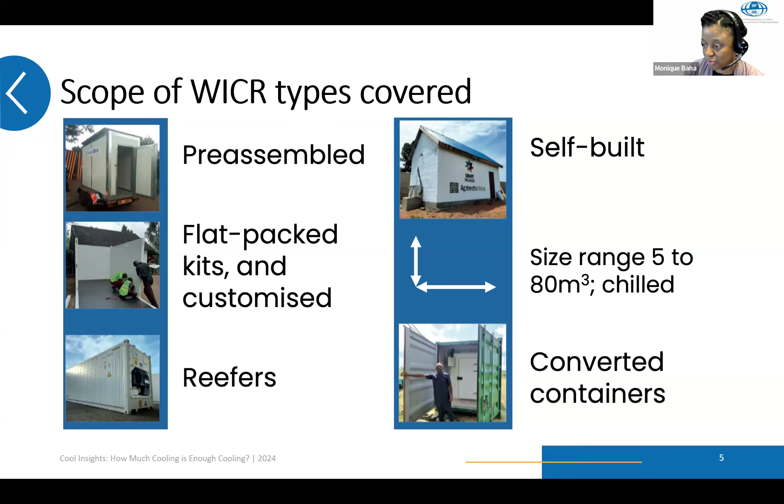Today's speakers: we'll hear from several of the experts who helped prepare the guide, including Giovanni Cortella. Giovanni is a professor of thermodynamics and refrigeration at the University of Udine, Italy. He was president of the Commission D1 Refrigerated Storage of the IIR. His expertise is mainly on cooling systems, with a focus on the improvement of energy efficiency of plants and on heat recovery, aiming at fighting emissions of greenhouse gases.

We will also hear from Jeremy Tait. Jeremy Tait is a mechanical engineer and independent policy specialist for sustainability and energy efficiency of electrical appliances and equipment. He has over 25 years experience working with governments, national and international agencies, and business on technical policy and compliance. He has led and supported development of energy efficient policies and test methods for refrigeration and cooling equipment, HVAC, electric motors, distribution transformers, and virtually all types of domestic appliances in many parts of the world, including the EU, Egypt, Pakistan, and for the African Union Commission.

Since 2018, Jeremy has increasingly applied his experience to supporting energy access work in global South economies, establishing quality frameworks for appliances used off-grid and with unreliable public grid. Jeremy jointly led conceptual development of the practitioner's technical guide on walk-in cold rooms for rural and off-grid use in global South economies with the International Institute of Refrigeration.

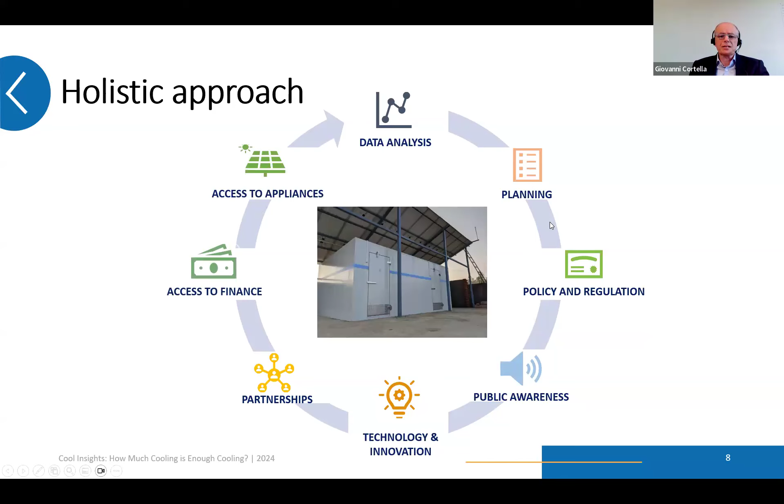In an environment where people are aware of the benefits of using a cold storage, so you have to train farmers and market owners, where cutting-edge technology is employed to improve effectiveness and reliability of the systems, so you have to train designers and technicians, where partnerships and links are established among the farmers, stakeholders and all actors, and finally, where access to financing and state-of-the-art appliances is made easier. So that's the reason why we are talking about a holistic approach, and that's the reason why we were moving to a process which is in this slide.

And this is the ideal path that the guide aims to describe. It can be schematized in a flow chart. This flow chart, you can... oops, something went wrong there. Monique, maybe you had better drive the slides because there's a delay when I move them. So please, can you go back one slide? Thank you so much, you better control it.

So we were saying this is the ideal path that the guide aims to describe, and it can be schematized in a flow chart. This flow chart follows in some way the contents of the book. The aim is to offer guidance through the steps to plan, specify, install, and run a cold room, enabling effective discussion with specialists, suppliers, and funders. So specifications for a cold room are not easy to define, and this integration of the cold room into a value chain is quite complex as well.

And possibly it needs independent professional advice, better if found locally, because you have to consider specific requirements of the area or the market. So the path from the first idea to an operational cold room is shown here. First, you have to check if a cold room is the right solution to the problem, through the evaluation of the market needs and the availability of technologies and funding. This is a crucial point.

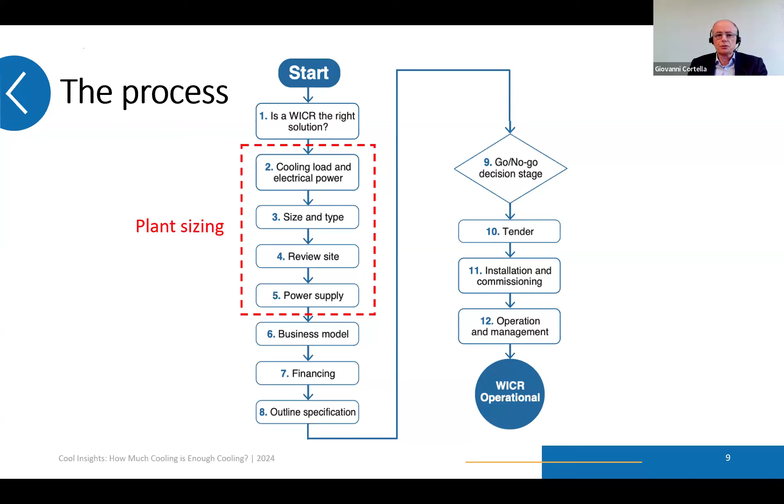Installation is a crucial phase, because good installation prevents unexpected failures in the future and allows for a long lifetime of the system. Commissioning is important as well for the same reasons. So during its lifetime, the system has to be operated, maintained, and managed, and this is the last step in the guide towards a fully operational walk-in cold room.

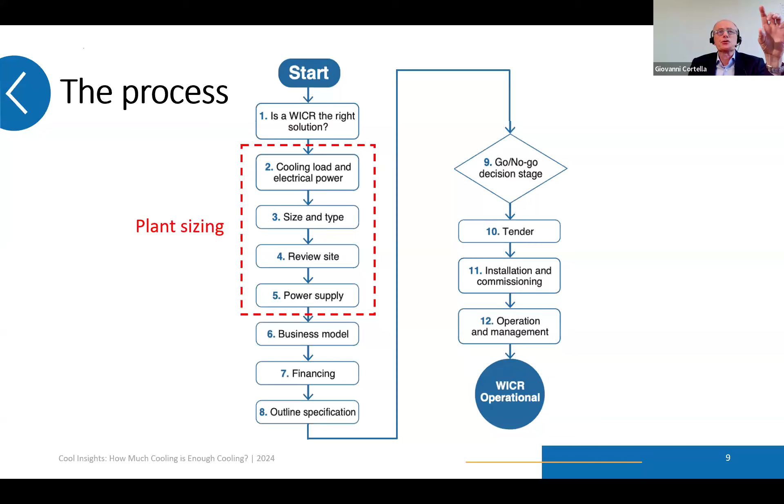We don't have time to go too much into detail among the various phases in this flowchart, but it's important for us to show you how detailed the discussion of these topics is in the guide. In the next slide, we can see what happens when we deal with sizing of the cold room and the cooling system.

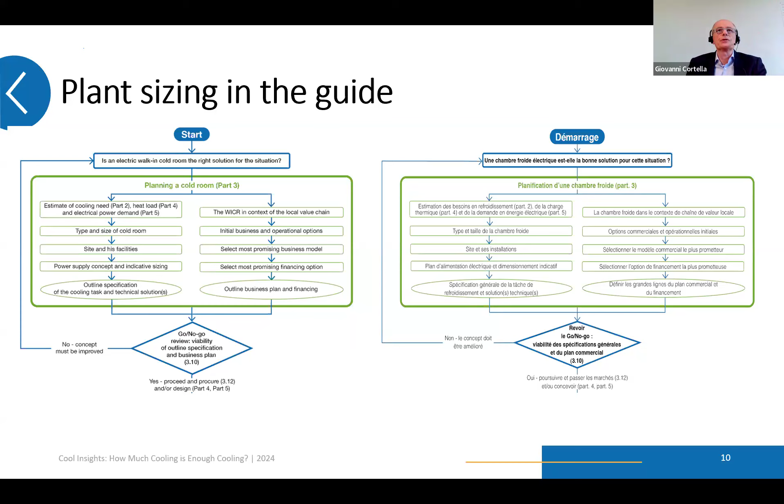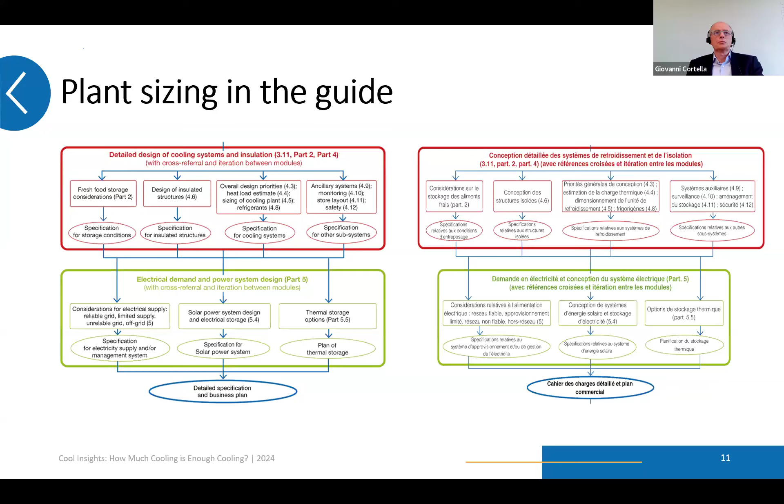As well as estimating the electrical power demand and the power supply options described in part 5. In the next slide, we will see what will be the topic of the next speakers. They will cover the path from cooling to the power supply.

First, we will discuss the importance of pre-cooling, posing the question of whether the plant aims to cover pre-cooling needs before it is correctly designed. A cold room designed for pre-cooling will be able to supply also cold storage if needed, while a cold room designed for storage will definitely fail when warm produce is loaded. So that's a very important choice.

This electrical power need should ideally match the energy availability. However, solar energy prevents having energy availability 24 hours a day, and thus this requires some kind of energy storage, which can be electrical or thermal storage, and we will deal with both. So this is the agenda for today.

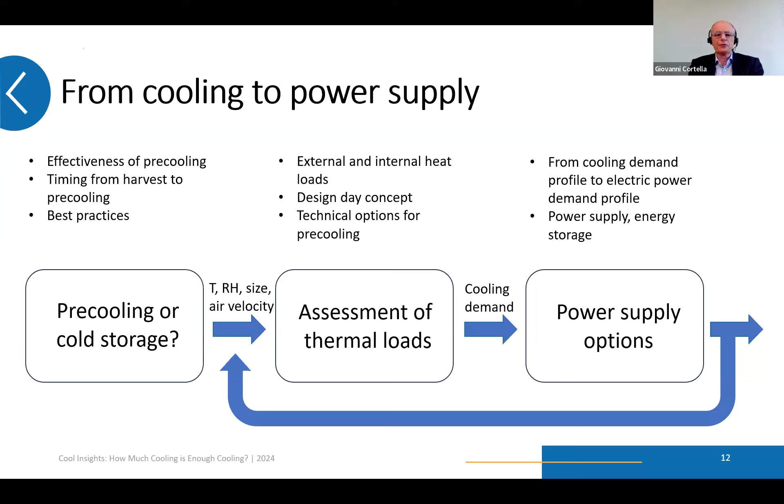Thank you, Giovanni. Yes, I will be talking about cooling and the purpose of cooling and cold rooms. Let me see if I can go through the slides.

First, I want to take a step back. Why are we cooling, and why is cooling so effective? Basically, what not many people know is that fruits and vegetables are alive. So when they get off the tree or from the ground, they're still alive and breathing, releasing heat. They dehydrate, they can be hurt if you drop them, they can get sick from diseases, and they can die when we throw them away. This process of being alive can be influenced by regulating the temperature, relative humidity, and airspeed around the product, meaning that we can control how long fruits and vegetables can be living in this process.

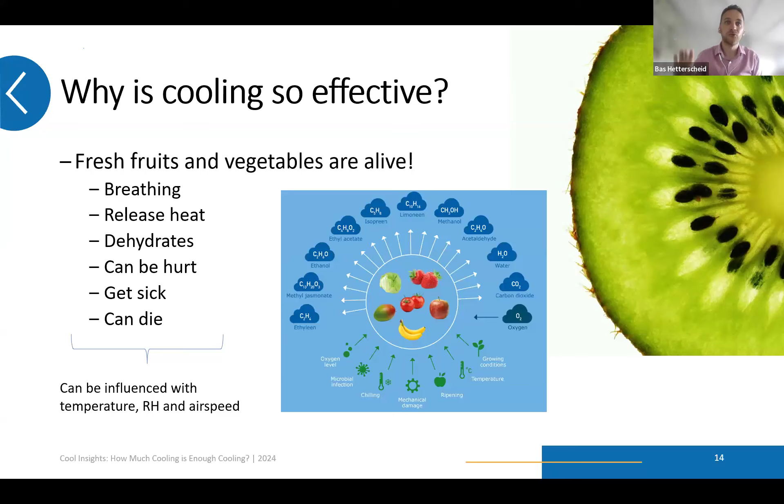So that is actually where, or why, cooling, relative humidity, and airspeed are so important. And that's also depicted in this picture where we show the control measures in green as well.

Knowing that the products can be influenced, we want to know how they can be influenced, and that is elaborated quite nicely on page 26 of the guide being presented. In the guide, we elaborate the impact of temperature on products. For example, you see in the top table that respiration, the breathing speed, can be regulated by temperature, and the lower you put the temperature, the lower the respiration, the slower the deterioration of the product.

So basically in this overview, everything in green has a positive impact, and everything in red has a negative impact on the shelf life of the product. What you can see as well, for example with temperature, is that chilling injuries can occur. If you make products too cool, they can turn brown. For example, if you store a banana at 5 degrees, it will turn brown because it gets chilling injuries. So there's a balance we need to strike between temperature, relative humidity, and airspeed when designing walk-in cold rooms.

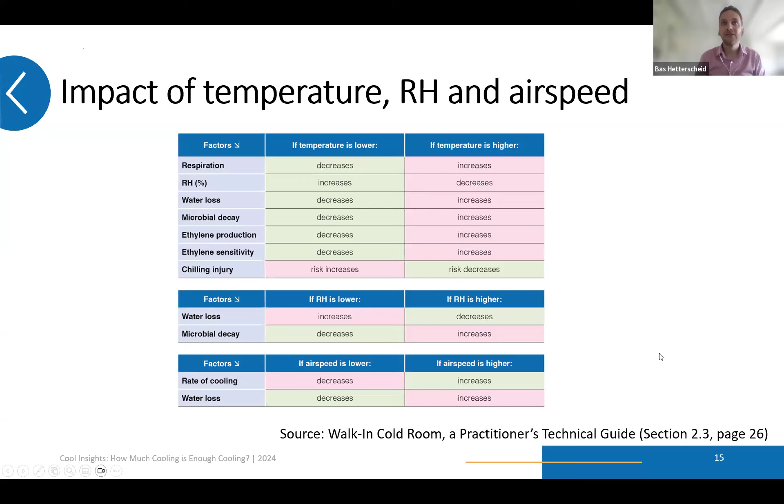Let me see, next slide. Yeah, there we go. Now that we know that cooling is so important, along with relative humidity and the others, I want to guide you through a little story about roses being transported from the Netherlands to Germany.

Basically, we did a test there with the University of Wageningen and looked at the impact of flowers being pre-cooled, so all the field heat was removed, and they were transported at 6 degrees, which is the lower part where there's an arrow with pre-cooled. And there was transport where the flowers got off the field and were transported in a refrigerated truck.

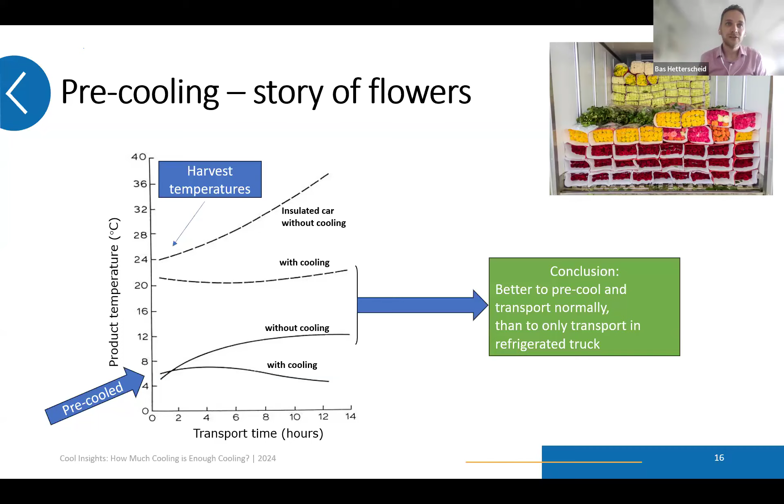What you can see in the two middle ones is that if you pre-cool and then transport without cooling, the average temperature during transport stayed lower than if you put it in a regular cooling truck. This meant that the flowers, when they arrived at the destination, were better when they were pre-cooled and not transported cool, while the flowers which were not pre-cooled and were transported in a cold truck were actually worse off arriving there.

Of course, it's best to do pre-cooling and cooling, but this shows the impact of removing field heat from the product, because as soon as the product comes from the field, it starts deteriorating, and you slow down the deterioration as soon as possible by applying pre-cooling. So this is why it's so important, and it shows the impact of pre-cooling compared to cooling in more storage and transport ways.

This of course comes with some conditions. If you get products from the field, there can be a lot of field heat. If a product is 20 degrees or 30 degrees, it has huge impacts on the need for cooling and the energy needed, and that will be addressed later in the presentation by Jeremy as well.

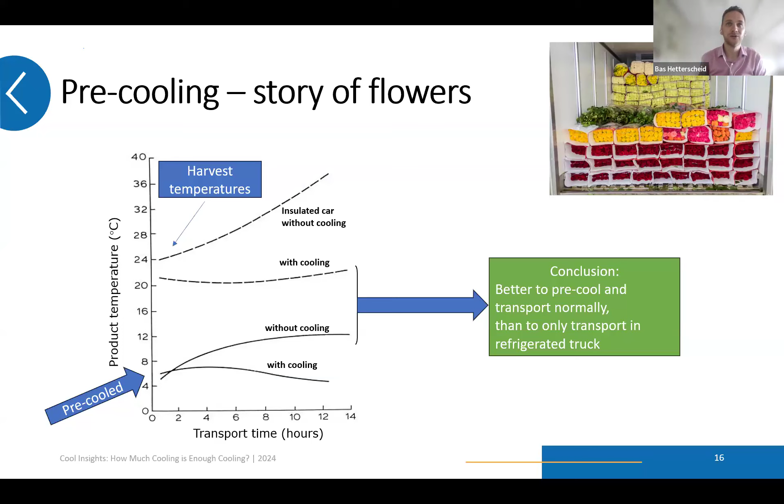So recognizing the importance of pre-cooling, the next question is, when is pre-cooling needed? We made a graphical picture about that, showing in red and blue where cooling is needed, or where it's not. Basically, from a post-harvest perspective, pre-cooling and cooling is always needed.

However, there's a limiting factor, which is economics. For example, if you have a banana and you pick it green from the tree, it can easily be brought to local and regional markets without the need for cooling, because it matures automatically over time. The same applies for mangoes, but also for tomatoes, for example. That is why for local and regional markets, hardly any cooling is needed from an economical perspective for fruits which ripen after harvest.

However, you see that the economical viability and technical need is high for products such as fresh herbs and cabbage, which are low in the right corner.

Important to recognize is that pre-cooling might always be needed from a technical perspective, but economically there are limiting factors, and that's highly dependent on the product-market combination, as shown in this overview.

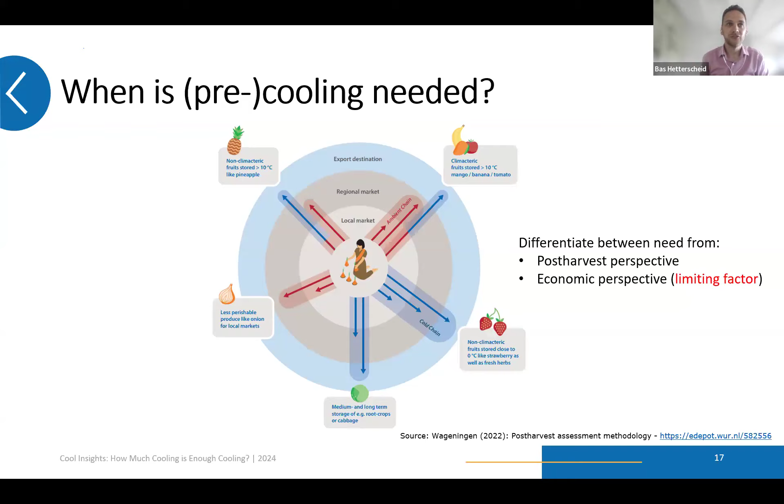When we want to apply pre-cooling, we have to know how soon we have to do that. In the guide, we provide an overview of different crops, such as broccoli, spinach, oranges and pomegranates, and the acceptable hours of delay until cooling is applied. For broccoli, cooling needs to be applied within 4 hours after harvest to make sure the water content and firmness of the product are secured.

But if we look at grapefruit, bottom right, the acceptable delay is 24 hours. This has huge implications for your supply chain design. For broccoli, you'd see much more decentralized cooling next to farms, while for grapefruit you can work with bigger aggregation centers where products come together. As said before, these figures depend on the product-market combination, but they are general guidelines to follow.

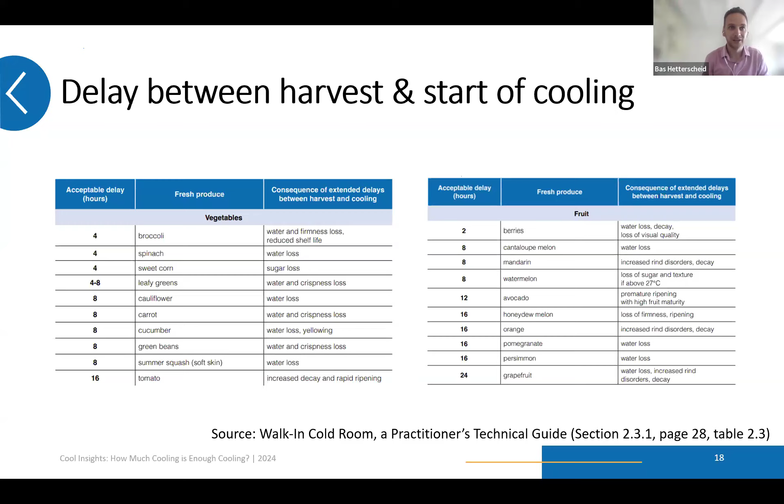Let me go to the next slide. If we're able to store products at their optimal conditions, with temperature and relative humidity controlled, then the shelf life of products can be increased quite significantly.

In the guide, we also provide an overview of products which can be stored, such as the banana on top. If stored at an optimal temperature between 13 and 15 degrees with relative humidity around 90%, it can be stored between 1 and 4 weeks.

If we look at potatoes, they can be stored for example half a year when handled correctly. The same for onions, lower part. There's a difference between dry bulb onions and green onions — green onions can only be stored 1 to 4 weeks, while dried bulbs can be stored for 4 to 32 weeks. You also see the range of temperatures differs per product.

So the guide provides guidance on the optimal storage conditions to be achieved, but also recommendations on the time the product has to be cooled to reach its optimal temperature.

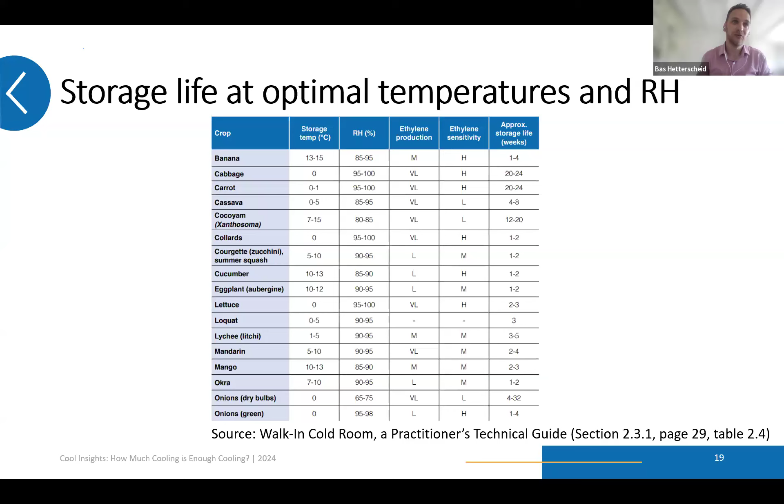A couple of considerations for cooling and pre-cooling: we recommend in the guide to harvest early morning. The reason is that products are then naturally cooler, meaning the heat load in the value chain will be lower. This benefits the product itself, since at a lower temperature it decays less quickly, and you need less energy in the supply chain to reduce the temperature further.

The third recommendation is about ensuring good airflow around the product. For pre-cooling, you want a lot of air flowing past the product to take away the heat. If products are overfilled in crates, this prevents the airflow needed to remove the heat. That's why we give recommendations in the practitioner's guide on installing pre-cooling and cooling.

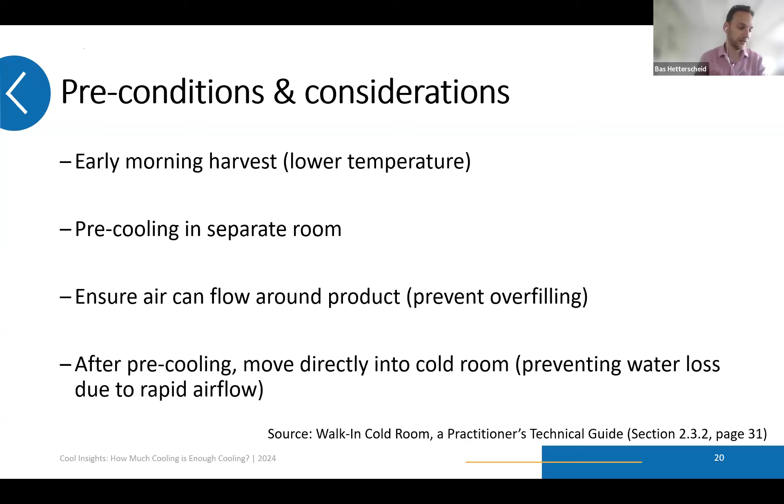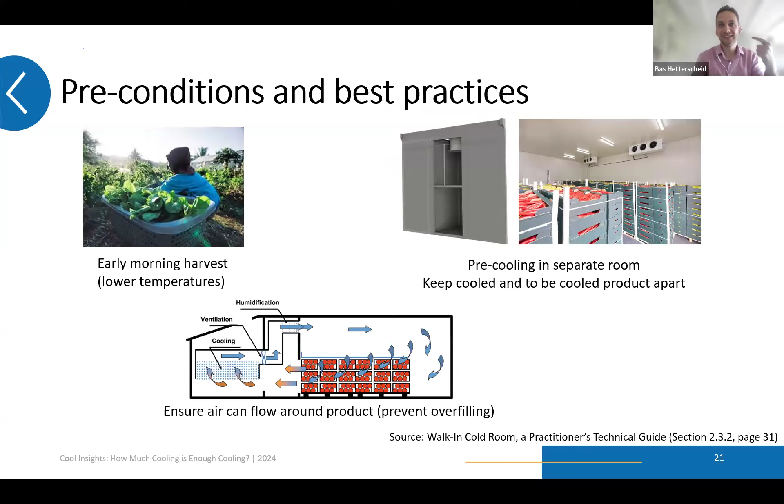I made nice pictures, I thought — here's the slide showing it in pictures instead of bullet points: early harvest, separate rooms for pre-cooling and cooled products, and airflow to prevent overfilling.

A recap before handing over: first, know that products are alive, and you need to treat them as they want to be treated, like we want to be treated — keep them at the comfortable temperature they like, with the relative humidity that prevents them losing too much water, and in that way we can extend their shelf life.

Second recap: cooling and pre-cooling is technically always needed from a post-harvest perspective, but can be economically challenging. So always make that consideration, as Giovanni mentioned, about the business model. This is the second recommendation: looking into both the technical and economical need of cooling and pre-cooling in value chains. With that, I'd like to hand over to the next speaker.

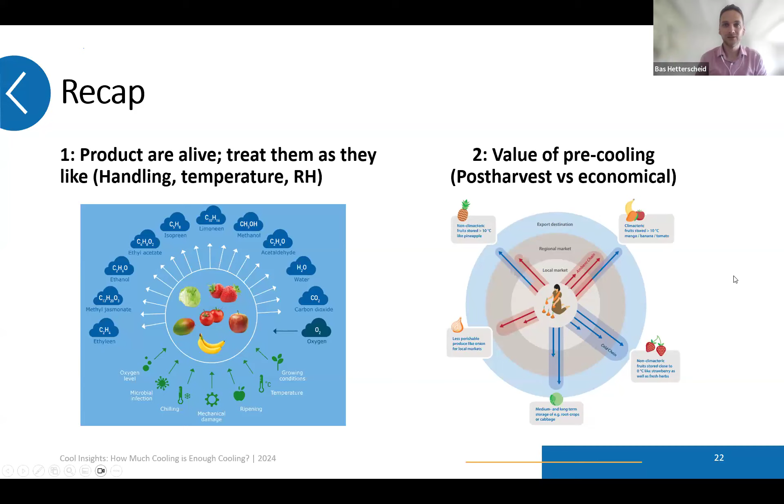One of the motivators for preparing this practitioner's guide was being aware of how many cooling plants and cold rooms we were seeing, that colleagues working in these countries were seeing, fail. We did quite a bit of research, and Bas's team at Wageningen looked at why these plants failed. One big issue was equipment that was too small, too underpowered, without enough cooling capacity, or alternatively plant that was oversized, had too much capacity, was too expensive to run, or demanded too much power, which simply wasn't available from the power source at the site.

So we've got the challenge, and today we're going to mention some issues to help people put a number on the cooling capacity needed to do the job required. It's an important topic, quite a big topic. We certainly can't cover all the detail, but I wanted to cover three key things in the next 10, 15 minutes or so.

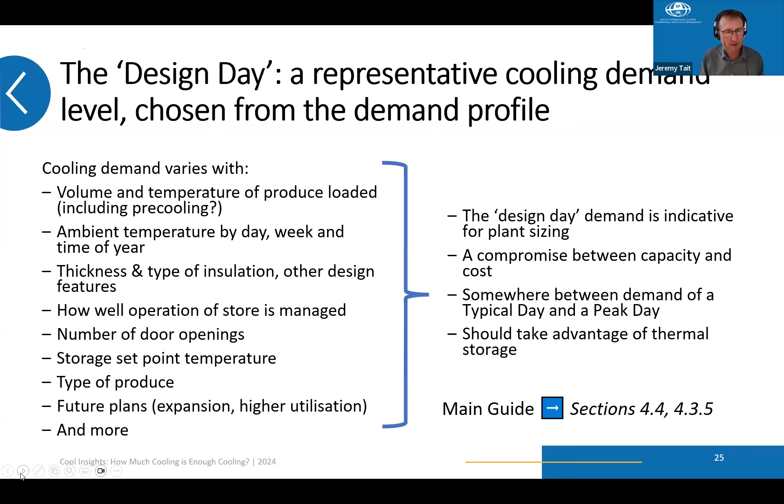On the next slide, we tried to put this concept into a fairly simple chart. If you think about the bottom of the chart, increasing cooling capacity, basically the payback period, or the total costs — if the plant is too small, you've got missed opportunities for the business. It becomes inadequate to do the job, so you've got opportunity costs there. If it's oversized, it also becomes too expensive to run, and less efficient for most of the time.

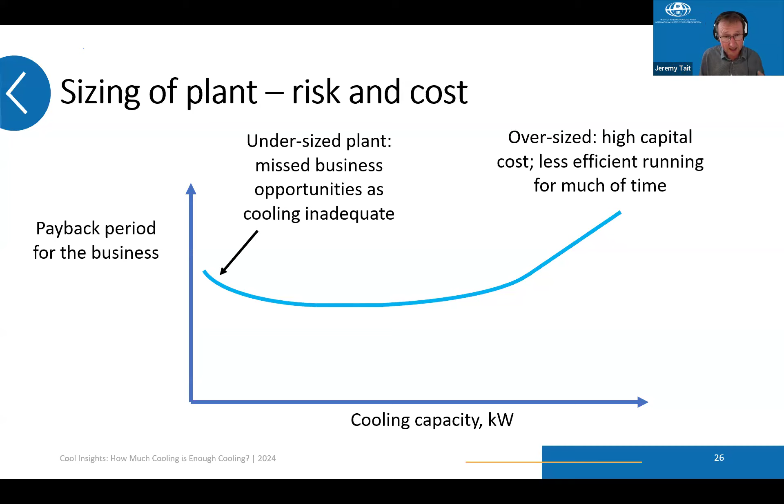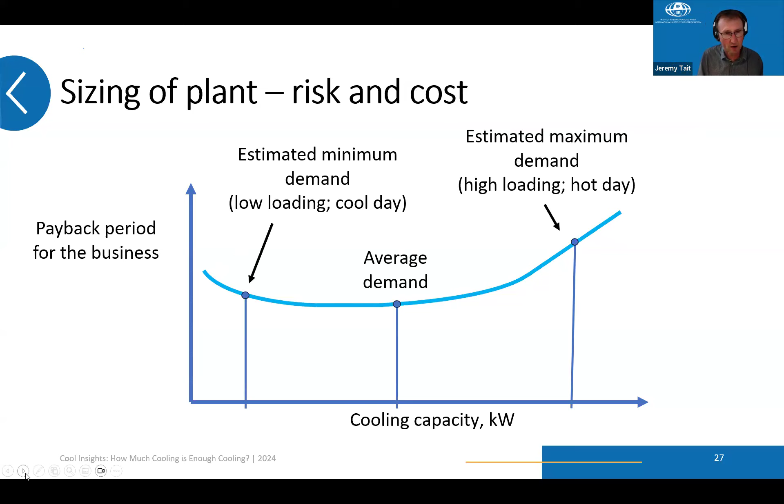You want to get some idea of where the minimum and maximum might be, some idea of the average, and choose a design day setting somewhere between the average and the peak. This is going to be your decision — you've got to make some sort of compromise here, but you do need a decent idea of what your load might be to have plant that's going to be able to do the job.

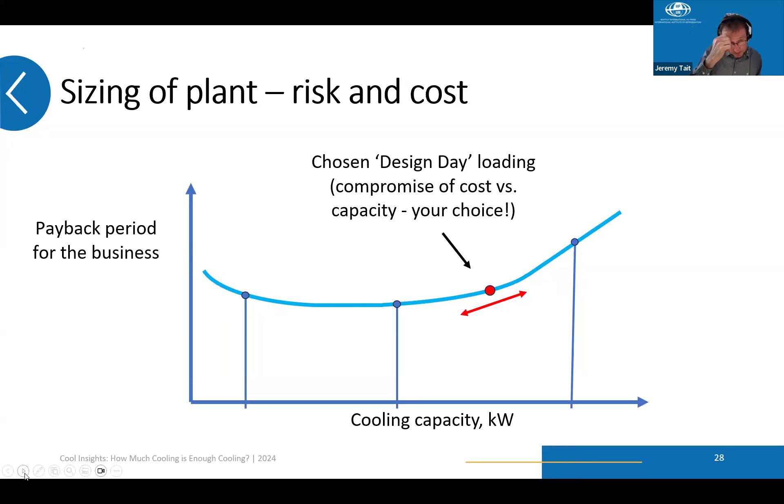Within the guide, there are options given for how to put numbers on these. There are equations you can use to calculate based on properties of each of these, the types of equipment we're talking about. There are links to online models, some produced by suppliers of equipment, some by technical institutes, which can be used to enter the details of your particular configuration and help estimate the heat loads. There are also calculation tools available to download that can help you through this process.

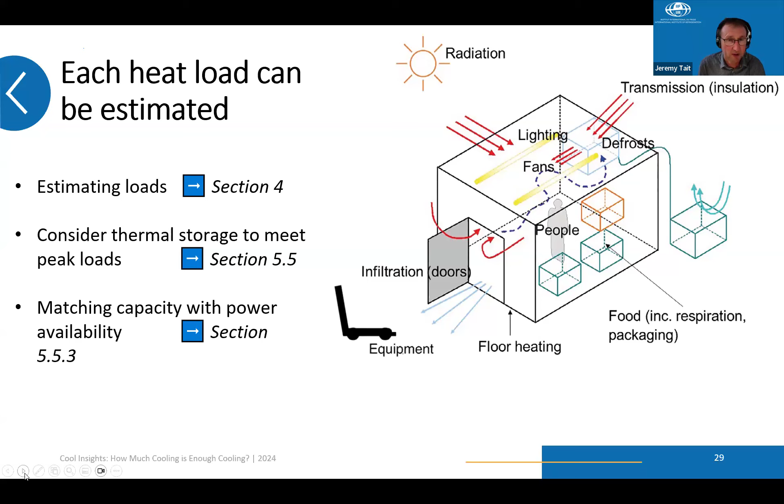But it's a good idea to start simple. On the next slide, you can perhaps start with simply looking at what the heat load is through transmission — there's an equation to help you do that. If you know the area of the insulation around the cold room, the thickness and the type of insulation, formulas are given to help you calculate the actual heat load that comes through. If you can make that relatively simple calculation, you can then look at what capacity in your plant is left over for dealing with everything else, and start to get a feel for just how feasible it is.

Victor will be talking you through an example of this in a moment, which I think will be helpful to understand the process and some more of the thinking that needs to go into this. So you don't have to go through all the maths yourself, but if you familiarize yourself with the contents of the guide and the issues flagged in there, you can then have a relatively detailed conversation with suppliers or experts or people you can discuss these things with, to help each other through the process of getting a plant that's actually up to the job.

You basically need to find people that you can trust to advise you on what types and capacities of plant are going to be needed to do the job.

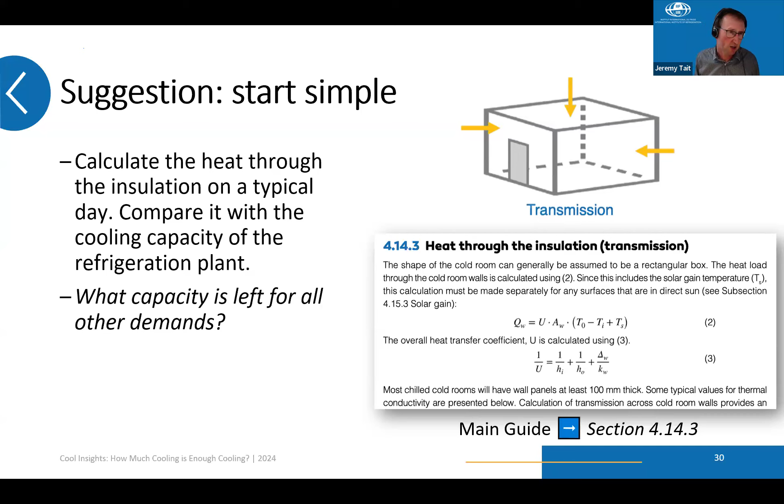We can also give some benchmarks in the guide for what sort of capacities you might expect. On the next slide, we show some benchmarks pointed out by our friends at the Post-Harvest Education Foundation, referenced in several papers in the guide. This table gives indicative cooling capacities found by experience to cope with the demands of certain situations.

These vary depending on the square meterage of the cold room and how much is in it. There are ranges given for a store at around 1 degree centigrade and around 13. That range shows the capacity needed in a moderate climate versus the upper range needed in a lowland tropic or semi-arid region. This should give confidence that the capacity of kit you're considering or being offered can do the job needed.

Having adequate cooling capacity is not enough, as Baz has already pointed out, and we need to put some numbers on the airflow needed as well.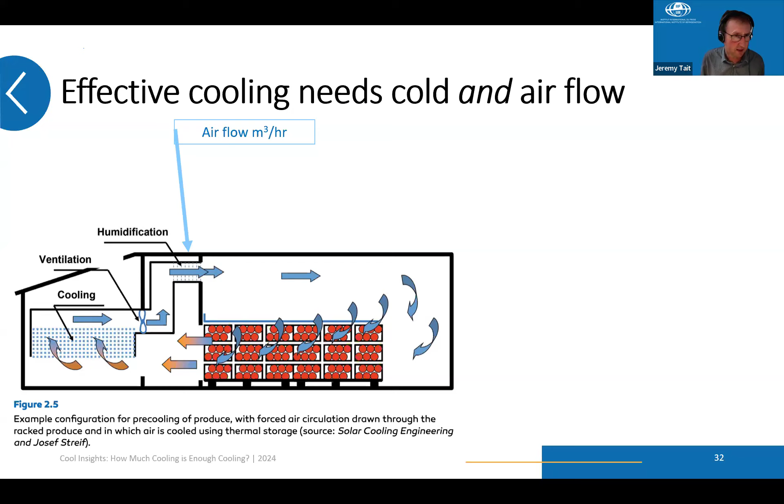Through research on benchmarks commonly used in Europe, and similar benchmarks found in Indian government advice, if you look at the airflow achieved by the fans and divide that by the volume of storage in your room, you get a ratio called the air changes per hour.

Good practice for Europe generally suggests you need around 50 air changes per hour for storage. If you want to achieve pre-cooling, you'll need at least double that. 120 is a figure that tallies with good practice advice for Europe and Indian government advice, and it was surprising that these numbers were not being discussed by many other suppliers of equipment in this market.

We want to generate more discussion around that. We're looking to find out what benchmarks are possible and in use in these global south markets, and I'll mention at the end some work we're doing to move that forward.

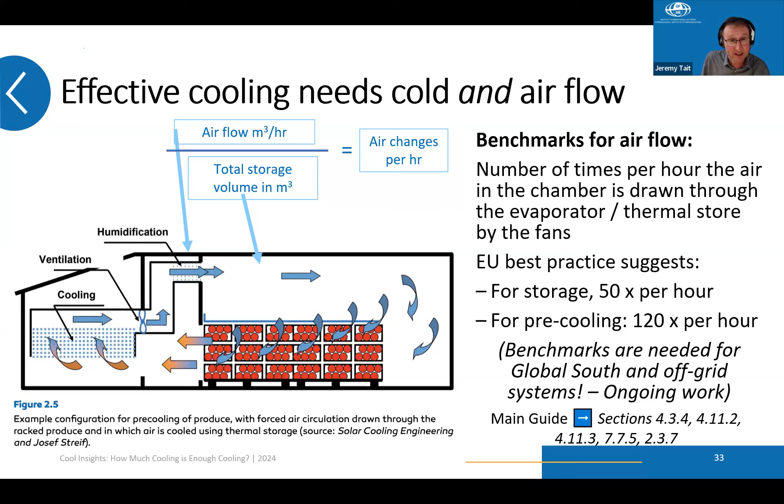The last stage I'll mention is turning that cooling demand into an electrical power demand, which you can then consider in the electrical system specification. If you're using a monobloc through-the-wall unit, there will be an electrical power demand quoted based on its cooling capacity. If it's a bespoke system with lots of components, you can look up the figures from each component, particularly the compressor and anything using fans, since they're high power units.

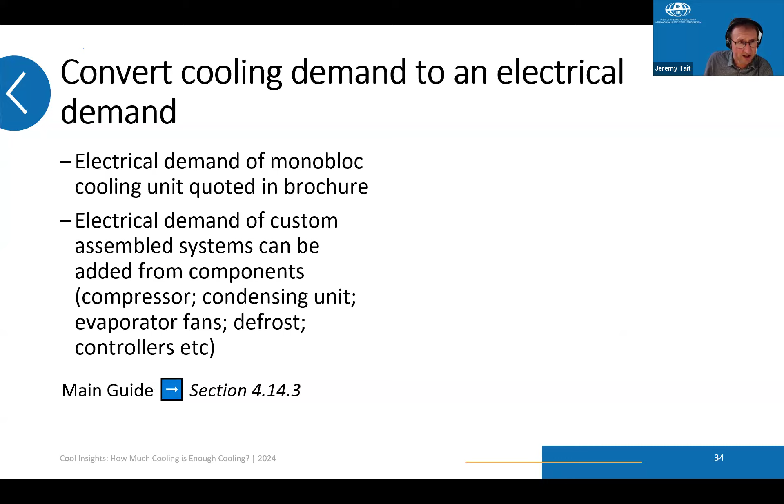That can be added together, and together with the next list there, all the other electrical loads that together make the basis of a design day for electrical demand. Judgments have to be made on what's the typical, what's the highest likely demand for each of these uses for power, and adding them together you'll get a decent feel for what sort of total electrical demand you're going to need.

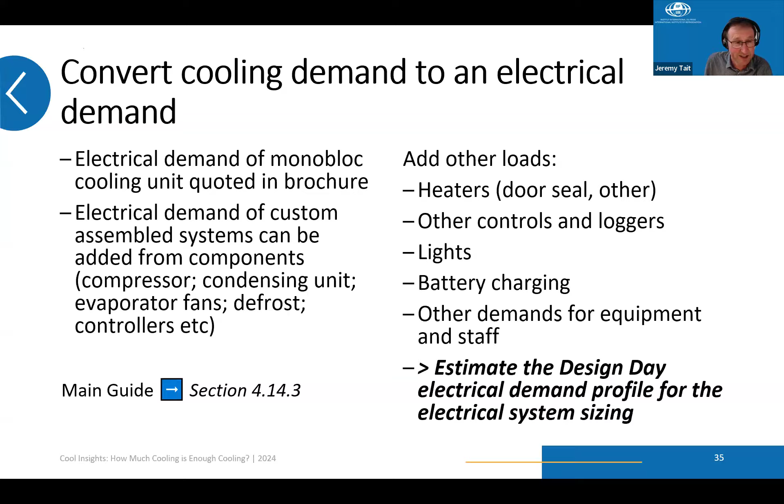And that is what is handed on to the electrical system specification. Victor will pick up that theme, as well as recapping some of these other aspects I've mentioned, to think about the specification of a system for powering the unit. So I'll hand over to Victor, if he's standing ready, please pick up that, and anything else you want to add to what I've already said, please do.

Thank you very much, Jeremy, and hello and welcome also from my side. My name is Victor Torres, and I'm very happy to drive you through an example so that we can see figures on the design process of a typical cold room.

If we go for the next slide, I would like to review the design process again for you. The first step, as Jeremy just mentioned, is to analyze the heat load, the heat demand of the cold room, based on different aspects, mentioned in 9 different steps, which are well described with the equations in section 4 of the guide.

The most important here is to analyze the thermal losses through the walls, the air infiltration, and, very important also, the amount of products that you are introducing into the cold rooms, if you are having pre-cooling, depending if you have separated rooms for storage and pre-cooling the products.

The next step, which is the one I would like to focus on in my next slides, is how to convert this cooling demand into electrical power. This is a very exciting process because the cooling demand is in thermal energy, and you need to convert that into electrical energy, and this is done by a cooling system, of course.

So we are talking here about vapor compression heat pumps that are able to pump the heat from the inside of the cold room to the outside with a certain efficiency. This efficiency is described through the coefficient of performance, COP, and this also depends on the ambient temperature and on the cold room temperature.

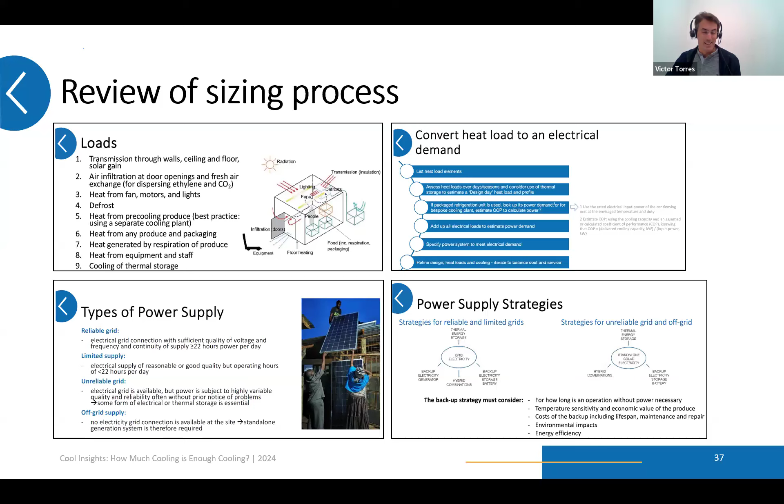I would like to go to the next slide and go a little bit more in detail. As I mentioned, in section 4 of the guide there are all the equations described on how to calculate the cooling demand, and in section 5 there are some examples, like the one I'm presenting here in table 5.6.

We have a typical 20-feet container size walk-in cold room with 100 millimeter polyurethane insulation, so typical sandwich panels. The cold room temperature is 2 degrees, and we are willing to design this cold room for a maximum ambient temperature of 35 degrees.

Here I come back to the concept introduced by Jeremy on the design day. Yes, you need to take a design day as an average of what you are willing to design, which is based on a typical climate day and also a typical cooling scenario with a certain amount of products. In this table you can find all the details of the cold room that has been analyzed, and here you see the heat loads.

This is the calculation of the cooling demand divided into the different factors considered: the transmission losses, this is the thermal loss through the walls, air infiltration, respiration, and so on. And we come here to a maximum cooling demand of 1,984 watts. This is what we are going to take as a reference for our calculation.

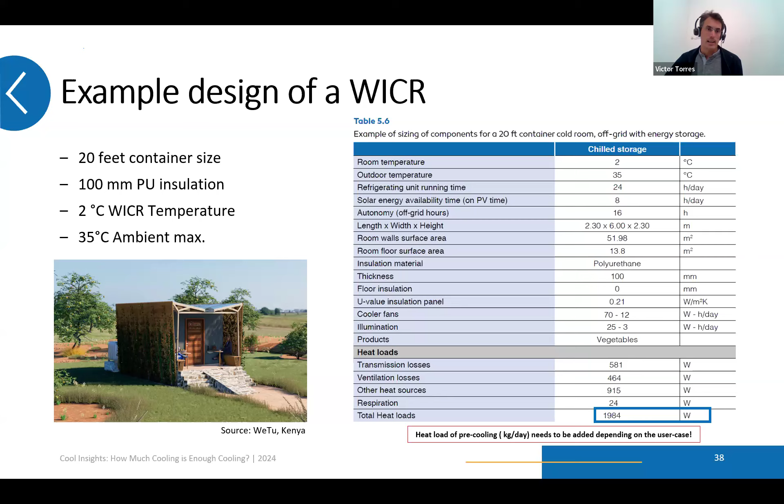So if we go for the next slide, please, we'll have a look here. First, before we start calculating more, we need to decide which kind of cooling system we are taking. It makes a difference, of course, if we are having a cooling system with thermal storage or without thermal storage.

Both cooling systems have the same working principle, so they are just built differently.

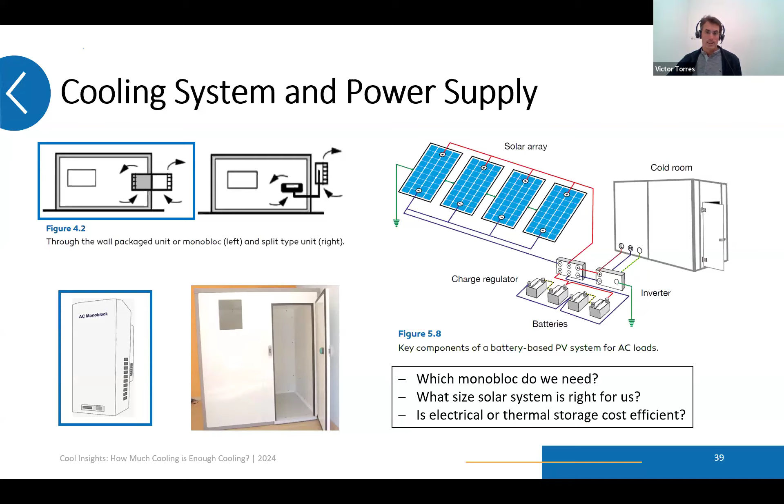In the next slide, we are going to select the monoblock type we want to use. I'm showing here a typical datasheet of monoblocks. We'll find different models depending on the compressor size, then the compressor input power, and then normally the cooling capacity.

This is the maximum cooling energy the monoblock can provide, based on the cold room temperature. Depending on the set point for that monoblock, we see different values for 0 degrees, 5 degrees and 10 degrees, given in watts. In our case, we need 1,900 watts for our cold room in the worst case scenario when the ambient temperature is 35 degrees. By the way, manufacturers also provide the cooling capacity based on an ambient temperature.

This is also important to consider - if the ambient temperature is low, the cooling capacity will be higher, as we are going to see in a minute.

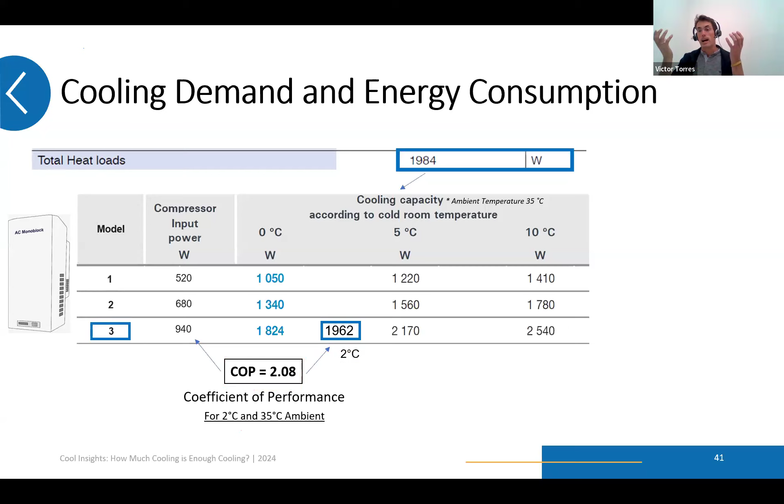Now we are selecting, based on that, model 3, which provides a cooling capacity of 1,900 watts at 2 degrees - this is what we need. If we divide this cooling capacity by the compressor input power, we get our COP, the coefficient of performance we can expect for 2 degrees cold room temperature and 35 degrees ambient temperature. This COP gives us the relationship between thermal energy cooling demand and electrical power.

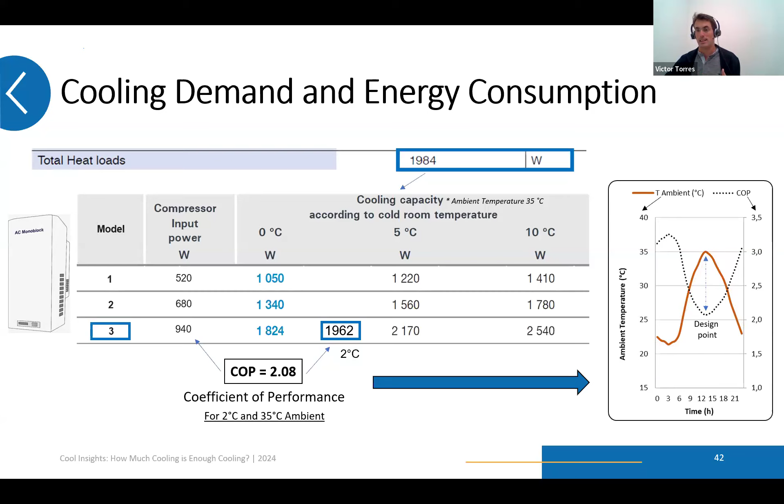In the next slide, I'd like to walk you through the typical cooling demand profile you will find. This is the cooling demand - you see here we have a maximum value of 1,900 watts, and divided by the COP, which is also changing based on ambient temperature, you get a profile for your energy consumption. This is the electrical power you are consuming - it goes from 500 watts to 1000 watts. So the duty cycle of our compressor will be around 74%, meaning it will be working 74% of the time.

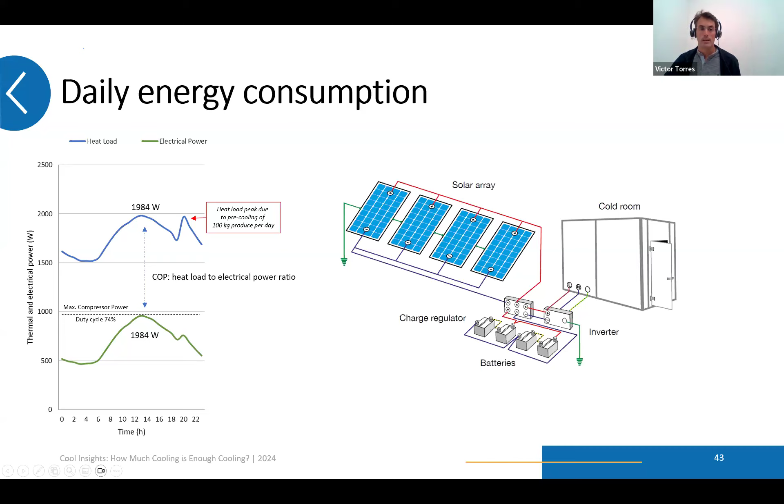Now we are going to calculate a suitable solar system for this. At the moment we already have the energy consumption all over the day for our design day, with the maximum and minimum power.

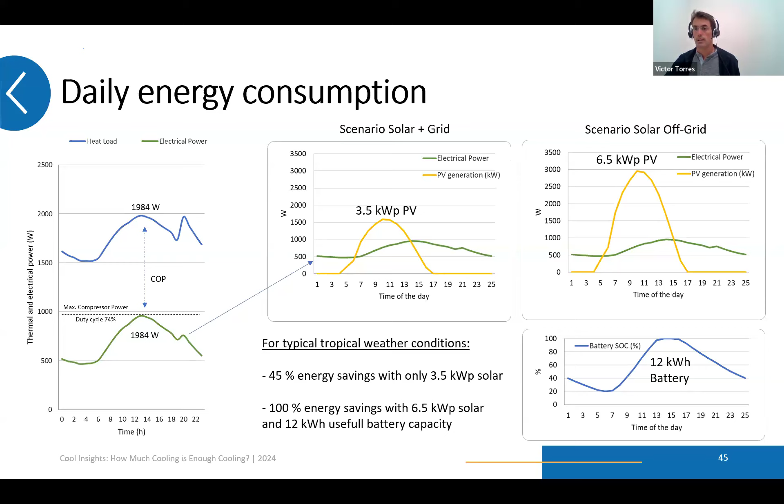Here you have a scenario of solar off-grid. In this case, we not only have solar, we also have electrical batteries. The energy provided by the PV panels has to be higher so it can cover the energy needed for the monoblock. This energy is provided directly by solar, and this energy is provided by the batteries. We are designing here a 12 kilowatt-hour battery useful energy, so we can run the cycle and have, overall, 100% energy savings through such a solar system.

So the recap of the considerations for the design is to make sure the coefficient of performance is well analyzed. You need to get this from the manufacturer. The COP gives us the relationship between heat demand and energy consumption, and it's only valid for a given ambient temperature and cold room temperature. If the ambient temperature changes because you're designing for another location, or you have another cold room temperature because you have another product inside, then the COP will also change.

Up to 50% of the energy consumption can be covered directly by solar, without batteries. This is very interesting, and is the ideal configuration for reliable grids. In most countries of the world, solar is cheaper than grid electricity, so this is a recommendation for reliable grids. If you have unreliable grids, then you will need to consider electrical batteries, which are also, in most cases, much more cost efficient than gensets.

Thermal storage is not only a way to substitute electrical batteries, but also serves as a buffer of thermal energy for high power pre-cooling scenarios. This is described in section 5 of the guide. To decide whether you want a big compressor, a big monoblock, or thermal storage, you need to do a cost-benefit analysis where you design for different configurations and analyze the cost of both.

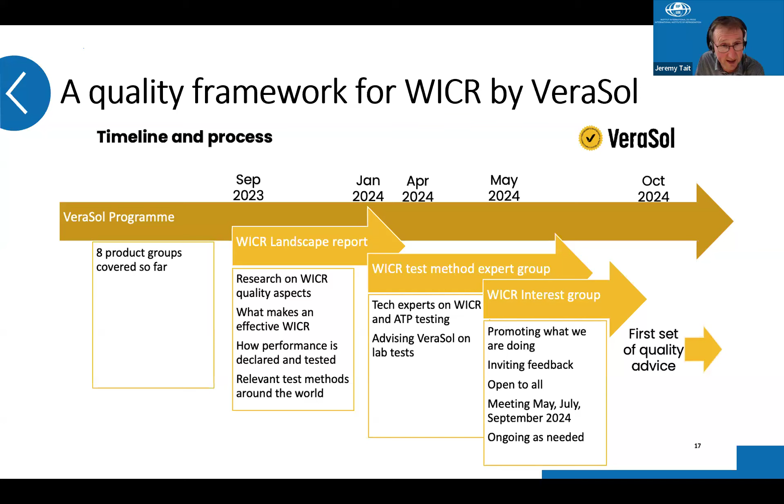The next initiative I wanted to flag is that the Global Off-Grid Lighting Association, the GOGLA team, have been publishing sales data to help understanding and encourage investment in this off-grid market. They publish aggregated sales trend data, and they would really like to start looking at how the market for cold rooms is developing.

They are inviting suppliers to help them by providing sales data. The data would remain completely confidential as far as the individual company is concerned, but they're working with the sector to develop the best ways to aggregate and publish it in a way that's helpful to understanding the market without compromising the interests of any particular suppliers. Please get in touch with Sarah at GOGLA if you're interested to help that process.

The third slide I had here was just a few selected resources taken out of the guide.

There are a couple of dozen links we've included to very good reference sources on different topics. I'd also flag that the more we're discovering about the excellent material published by the Indian government and by NCCD and other bodies in India about these topics, it's really some very valuable information being published by them, very practical and great insights on design and good practice. We flagged several others on this slide. The slides will be made available to you, and there's a lot more in the guide itself. The guide contains a lot more links, and we will invite you to read up on many more topics, whichever are most important to you.

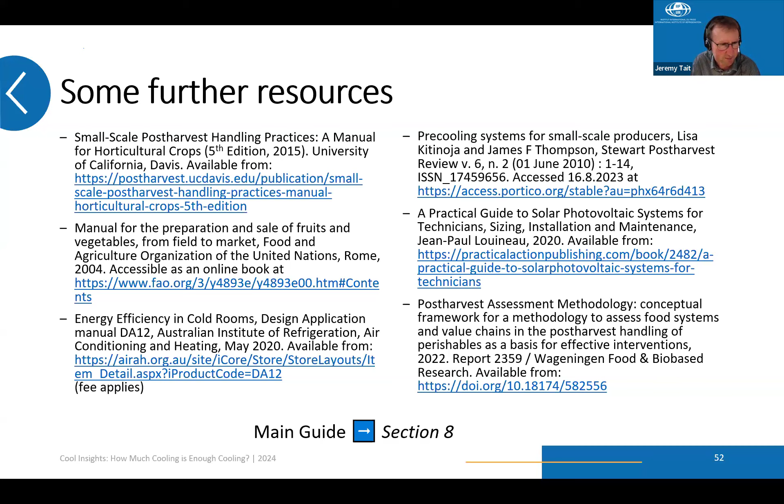I'm happy to hand back to Monique. Okay, yeah, thank you very much, Jeremy. I think there are no more questions. No, so thank you to all our speakers. Just a line to conclude, Monique, then I will hand over to you.

One suggestion: for the best use of your money, please take care of two things which are very important from our point of view. First, the cold room is not always the best solution. Maybe you need something different to enlarge your harvest season or whatever. So please take care to choose the best solution, which is not always the cold room. Second, please remember the speech by Hetterscheid: pre-cooling is very important. It takes another plant, another system, differently sized. So it's very important that the two things are considered differently, cold storage and pre-cooling. I think it's been one of the most important things we wanted to stress when writing the guide, so I want to stress them also on this occasion.

Yes, I see Jeremy would like to add. If I could just extend the invitation to all those who are listening, please help us work together to establish some reliable benchmarks, rules of thumb to help steer people through this rather complicated and tricky field of deciding what plant is right for them. The more we can gather in terms of evidence of what types of plant are working well, what capacities, what choices of design are working well, we're very keen to put some numbers on this and then publish and share those benchmarks back to the market through that quality framework and through other guidance that will be published by our team and others, we hope. So please, if you've got good examples of system designs that have been tried and tested, if you're happy to share that, we'd be very pleased to build up a better picture of what kit is working well and what numbers of capacity, to help people through this tricky process of decision making. It's an invitation to speak up, get involved, help the market develop. Thank you in advance for that.